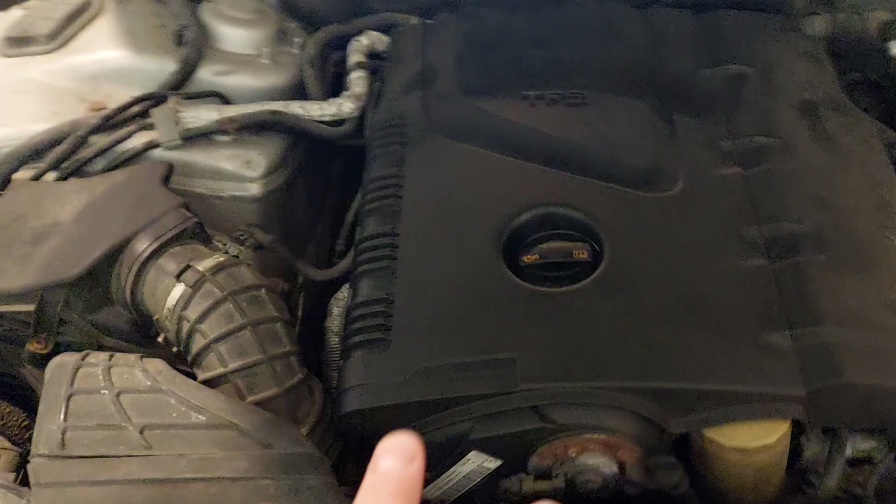Other than that, it's got stiff steering. The steering's super stiff when you turn. So the steering's super stiff, and it obviously burns oil. We don't know how much oil it burns, but

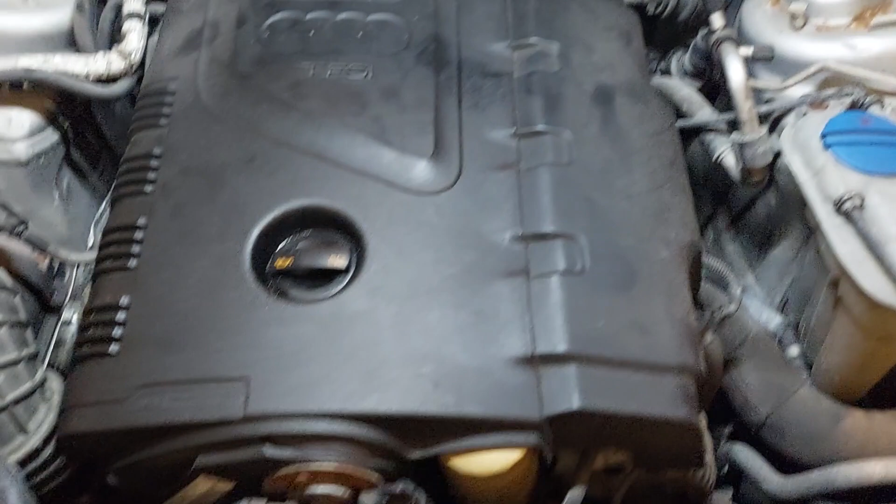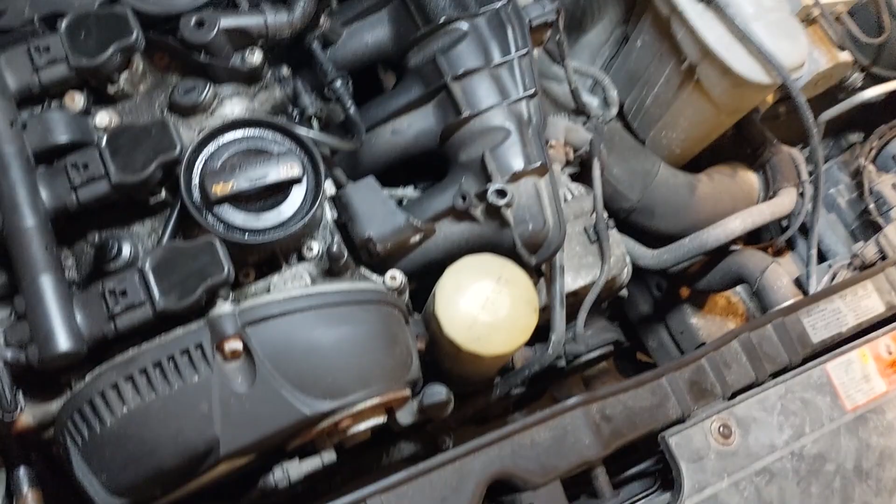Let's take a look. It's got a cylinder number 2 misfire. So I just want to see what it's going to take to repair this misfire. So I'm pretty sure it's 1, 2, 3, 4.

As you can see, we do have some oil leaks here. Okay, so I'm not sure where they're coming from, but that's something we'll figure out together after and see if this car is worth fixing.

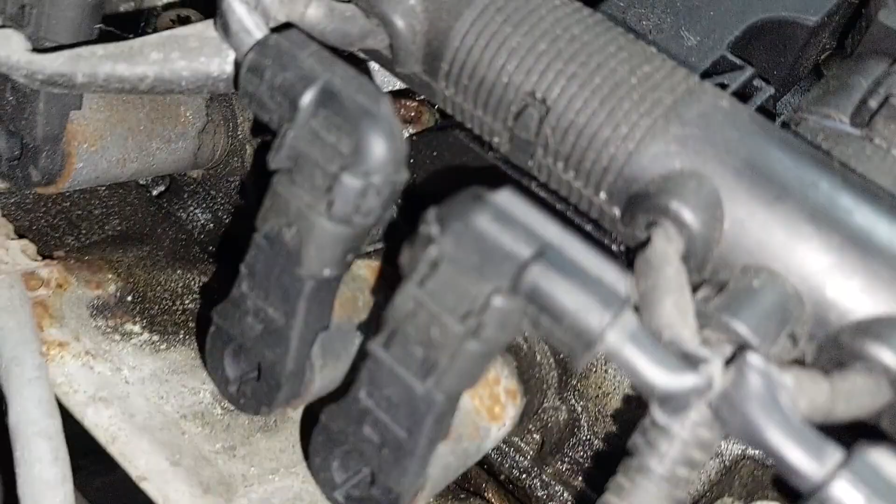Yeah, this is pretty oily back here. I know that this water pump, there's our fuel line, everything's just pretty much coated in oil. I'm wondering if this line's leaking or the diaphragm's leaking, oil cap or the seal, something's leaking here. So we'll have to figure that out. Both sides just look very oily. It looks like this seal is fine.

So first thing I'm going to do is swap coil 1 and 2. I just want to confirm the misfire is a coil or a spark plug. So let's do that right now.

So I'm going to... give me a second. Right now the first thing we're going to do is just swap a coil. That's all we're going to do. We're going to do it one thing at a time. So that's a 10 mil.

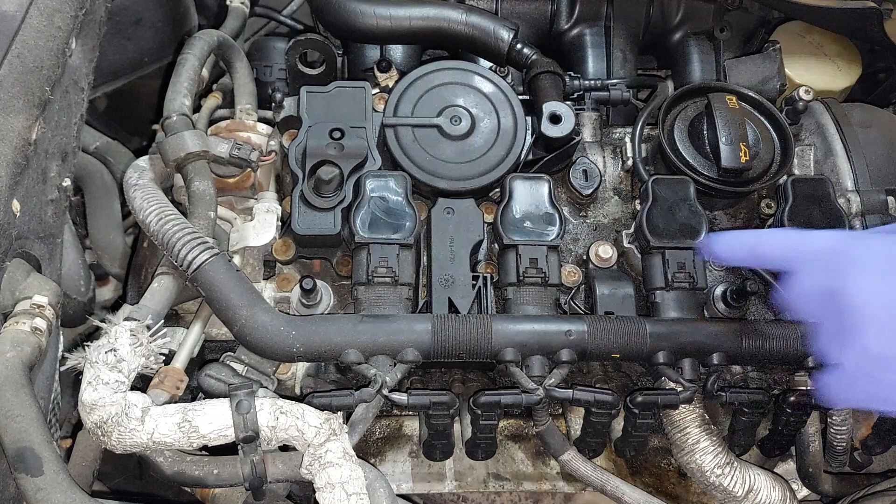Well, I think it's a 10 mil. Put it here. Okay, so it's much like the B7, the clips all just break. What are they hitting on? Well, I guess you go too far back and they...

Okay, there we go. So let's just check this one. Okay. Let's just look down inside, see how it looks.

Okay, so this one's number 2. So we're going to put this one in number 1 spot. Okay. So let's see if the misfire moves.

So make sure you check your connectors. Alright, see how it's coming apart a bit here. Okay. Actually, I would say that the B7's a little bit easier to remove this. Okay, we don't want to tighten anything up because we're probably going to have to take everything apart again. But we'll just put this nut so we don't lose it.

So let's go look at our computer. Okay, well, we got cylinder number 1 detected, but originally it was a cylinder number 2 misfire. So just take my word for it.

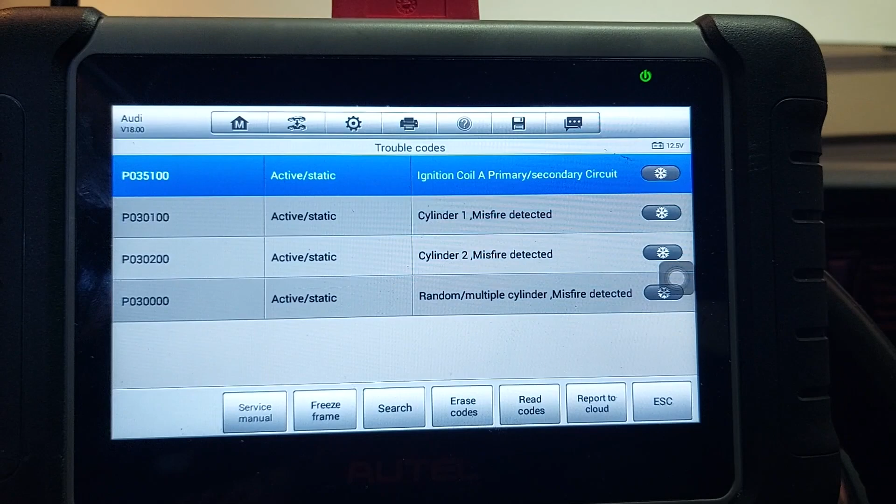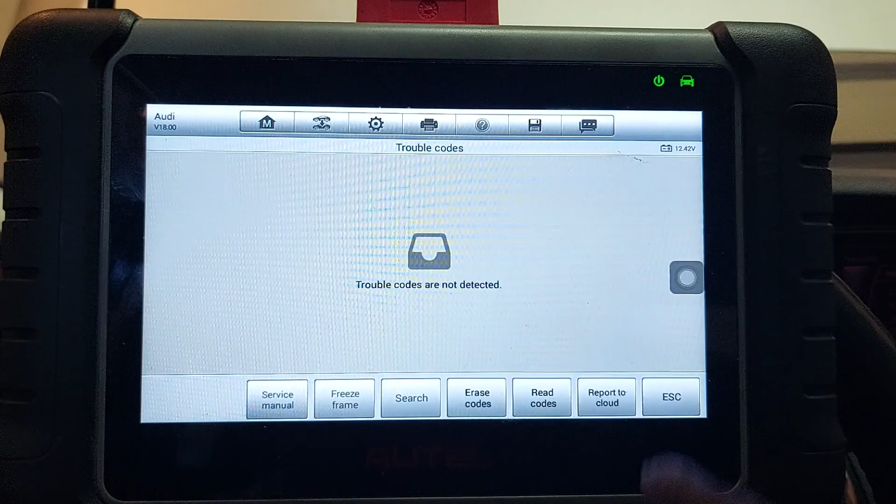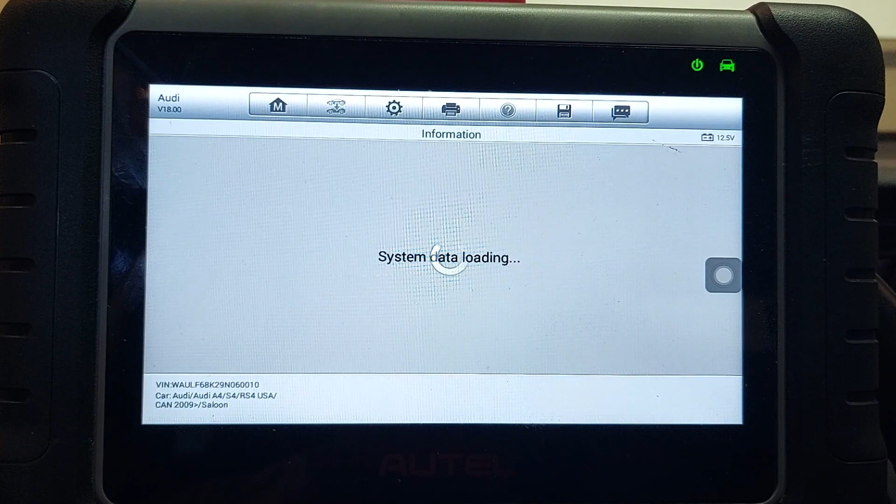So now we're going to erase these codes. Okay, read codes, should be nothing there. Escape. You got to remember, sometimes when you have a misfire, it can affect the other cylinder, the neighboring cylinder. So don't be surprised. So let's just find...

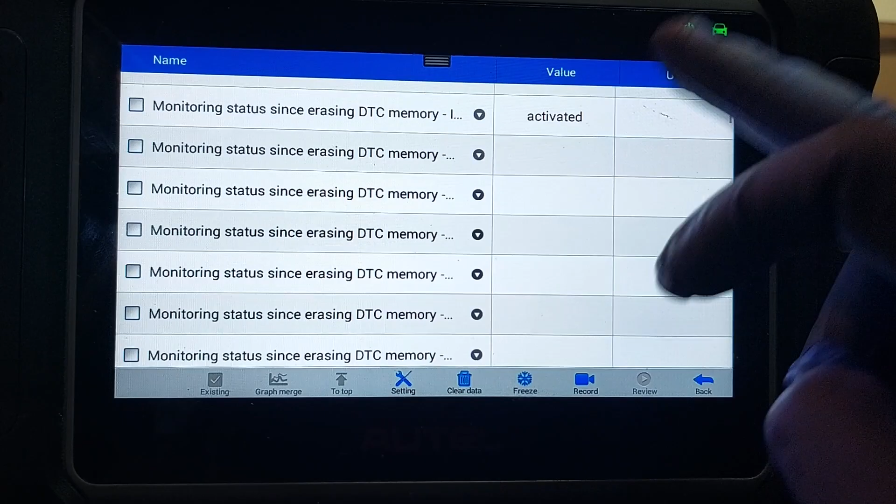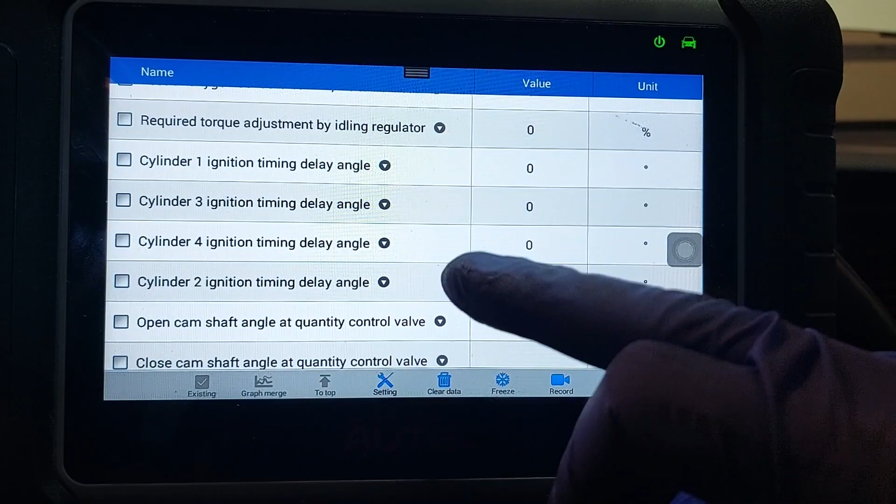Okay, cylinder suppression, misfire counter, where are you? Ignition delay, here we go. This is all we want to see. So let's just give her.

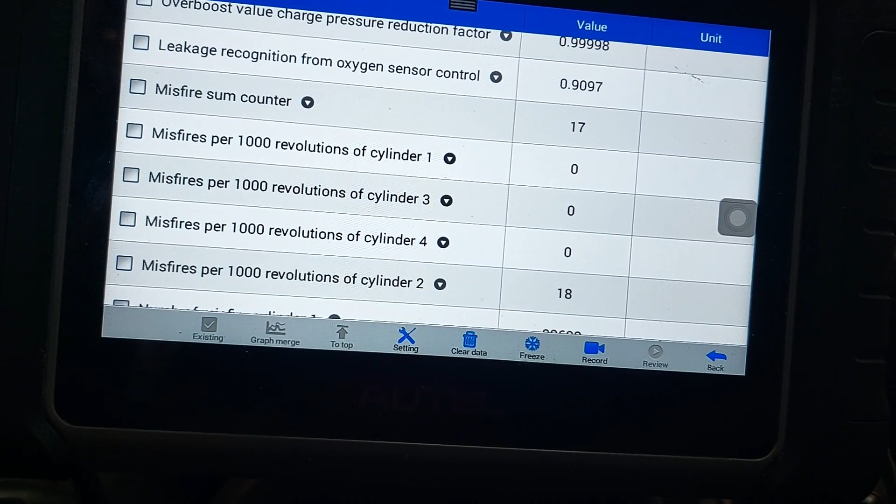Well, it's still at cylinder number 2. Okay, so it's definitely not a coil. Okay.

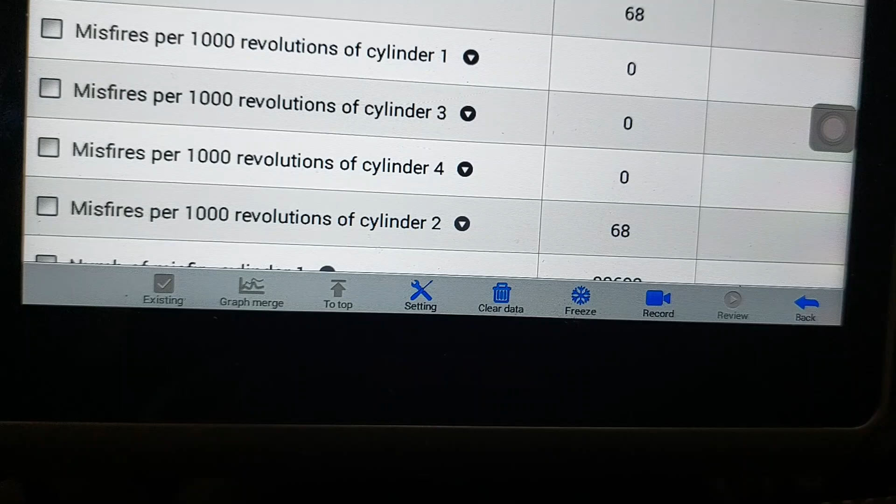Okay, so now what we're going to do is confirm that it's not a coil. Doesn't look like it's a coil, so it could be fouled spark plugs from the oil consumption this thing has. We're just going to ease this thing out of here without breaking anything.

Same idea, coil number 2. This coil goes here, and we're going to pull the spark plugs. My guess is they're all fouled. As you can see, the coil is, let's get a light on there. It's soaked with fuel, so we're going to clean that up.

Let's check the other cylinder. That's technically fine, see how this one looks drier? Either way, I'm going to clean both spark plugs up, like you've seen me do before. Just a brush and some brake clean, get rid of the carbon buildup, see if there's any cracking, and then we'll reinstall them.

Okay, the spark plugs are cleaned up pretty good, as best as I could. So we're going to put the number 2 spark plug here, and I cleaned out the number 1 spark plug and we're going to put it here. But I say, why don't we just have a look down in the bore? So I'm going to get my camera, and we're going to look down inside.

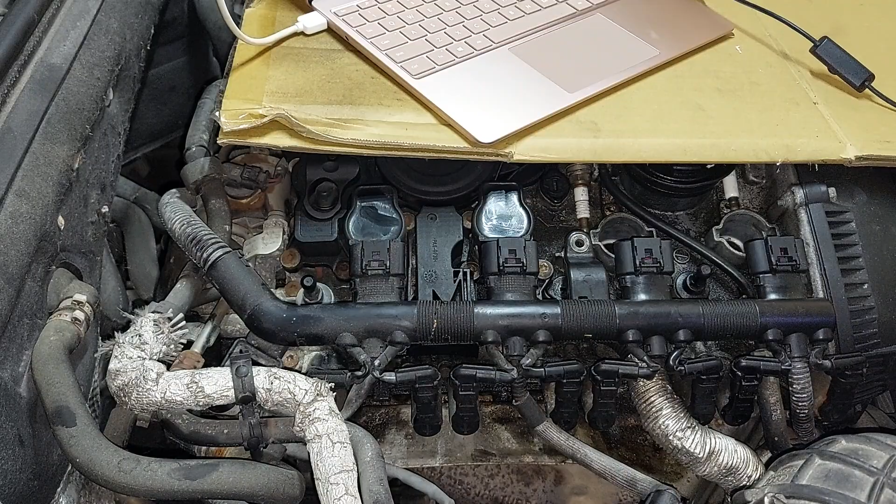Assuming you guys want to see this, so I can control my brightness. Let's take a look down in cylinder number 1 and see what we see, which is a cylinder that wasn't having an issue. Okay, come on, get in there.

Look at this one, it's a little wet. So here's what we're gonna do: if we want to see if the injector is dumping fuel, all we gotta do is this.

We look at it with the camera. Okay, get in there, get in there. And I'm just gonna open the door to the car, and it should prime the pump. And if the injector is leaking, technically you would see it, but I don't think that's the case. So what we're gonna do is blow out the cylinder to get rid of some of that, not helping on a dry start, and blow into the cylinder with some air.

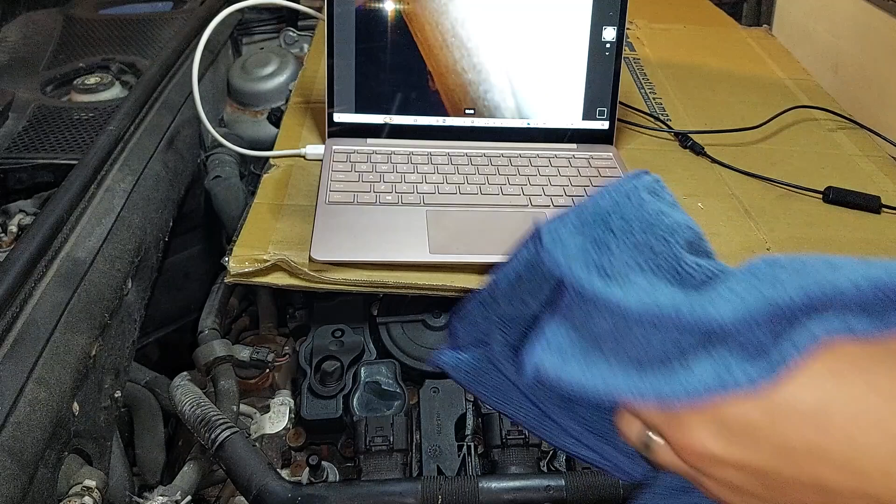You can smell the fuel, it's unburned fuel, that's what you're smelling. You can smell it, because there's no ignition, right? So you're fouling up the entire cylinder, it's just literally fuel washing down the cylinder.

So what we could do is put a drop of oil in the cylinder, and it should help with compression on startup. So we're just going to put a little drop of oil. Let's see. Okay, and that, we can take a look at that, see if it's working its way down into the cylinder.

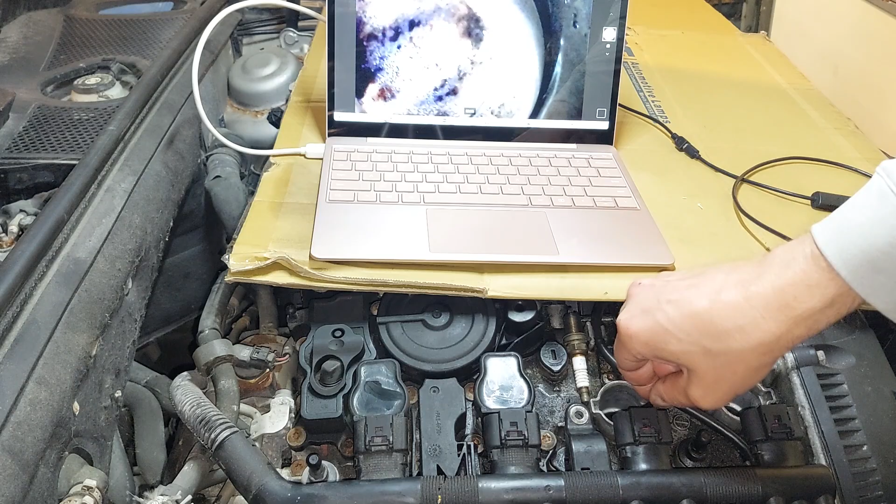Okay, and then what I'll do is I'll grab my gun and make sure that should help the ring seat on the initial start to get this thing going. There we go, we got some oil in the cylinder. Perfect, all right, so let's get this out of the way.

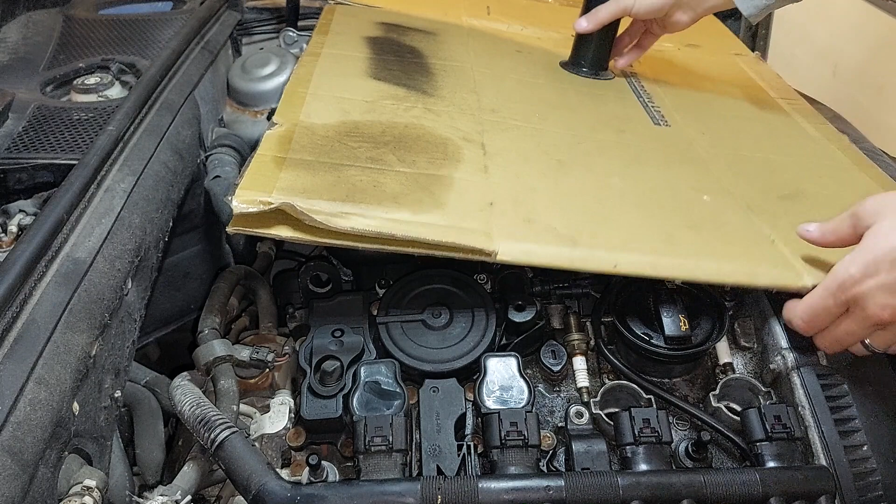Now we're gonna find out if it's a coil or a spark plug. Well, we know it's not a coil because we swapped it. So I'm also swapping the spark plug because I just want to make sure that it's not an injector issue. So this would kind of confirm that for us. What I'm going to do is put the spark plug from number 1 in here. They were way over tightened, but that's okay. All right, so this is technically the bad spark plug, if it is bad. I think it was just fouled. Okay.

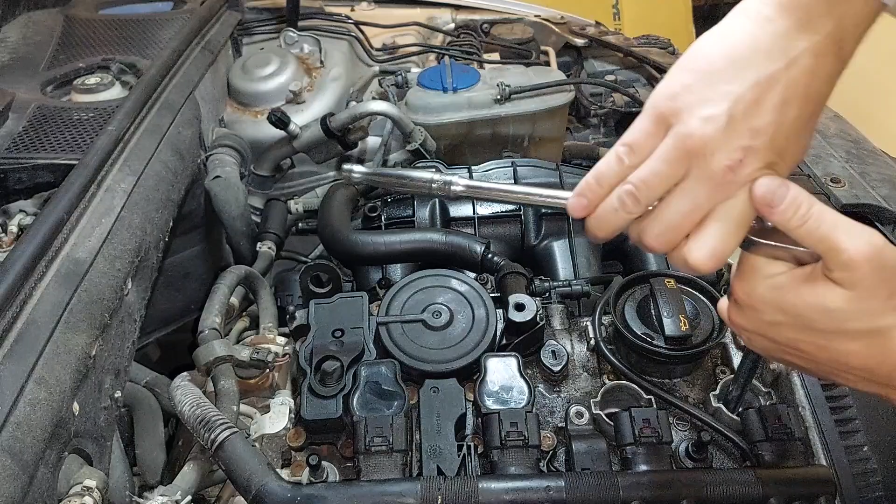Unless we have a leaky injector. I kind of doubt that. I think it's just from sitting, too many small starts. It happened on my other A4, and I just cleaned the plugs.

Okay, so now we have everything originally from number 1 in number 2, and everything from number 2 in number 1. So if it's not this, then we're suspecting maybe a leaky or faulty injector, although I doubt it's faulty because you can clearly see that it's been dumping fuel on those cylinders. Okay, so let's just get this all lined up here.

Okay. Hopefully it's not an electrical issue. Grab our bolt.

Let's go back in the car and see if anything's changed on startup and watch our misfire counter. Could technically just be completely fouled plugs. So let's...

Okay, there we go, so we're back in it again. All right, so we're gonna do trouble codes, make sure everything's deleted. Nothing yet, because it would be only pending. Live data, scroll all the way down to the bottom again. Where's our misfire counters? Oh, there they are.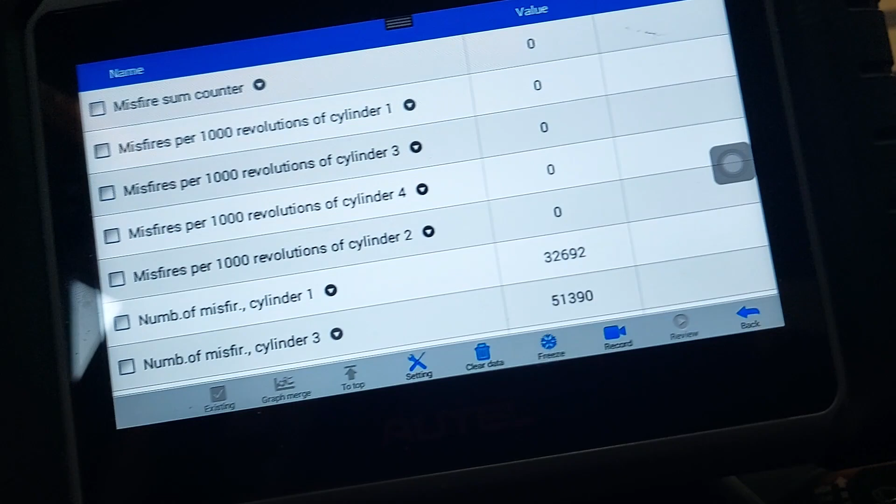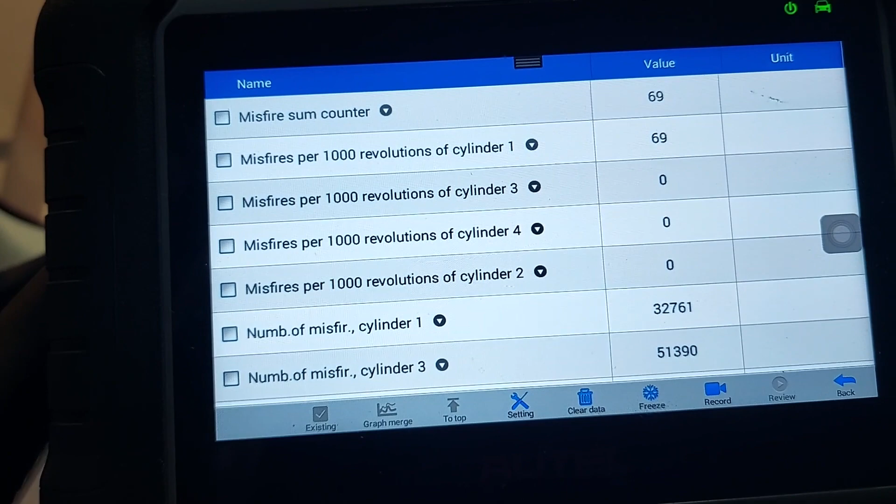Okay, so let's see what happens. Oh look, cylinder number 1's misfiring now. So I'm suspecting that we have a completely faulty spark plug.

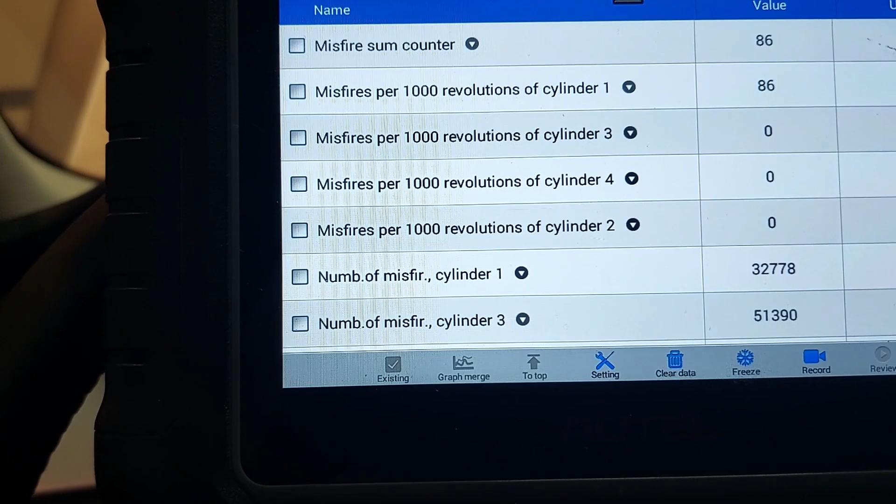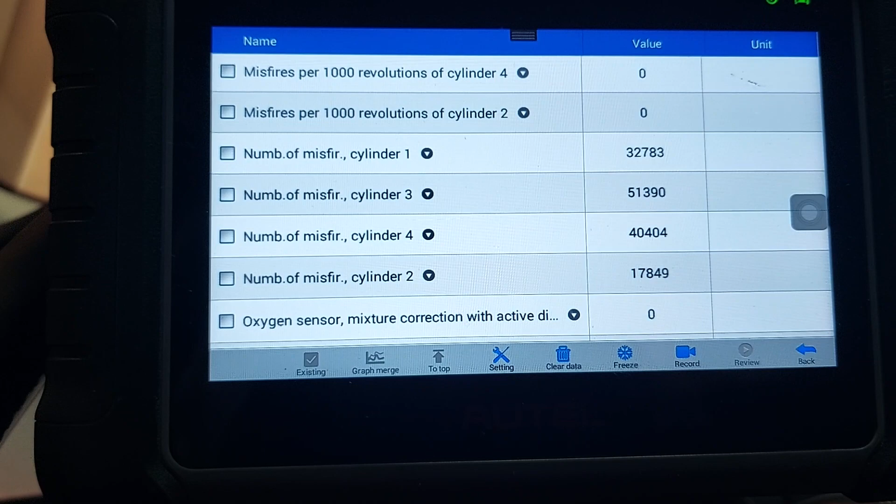So I don't know if we're going to be able to repair this without spark plugs. But let's try this again. Hold on. Oh, now see the misfire move to 1.

Is there any way we can tidy up that spark plug even more? Because we don't want to flood this cylinder. That we do not want to do. We do not want to flood this cylinder up. Is there anything else I could do to clean up that spark plug?

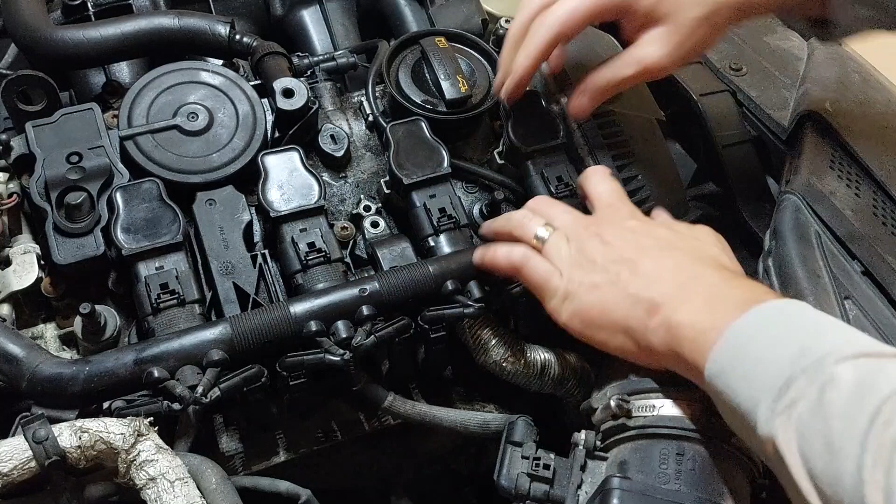We could try, it looks like it needs spark plugs and not a coil. So in my opinion, it needs spark plugs. So let's just pull this coil out.

Take that spark plug out again. Take a look at it one more time. See if we can revive it, unless it's cracked from just being fuel dumped on it constantly, which could be the case. Okay, let's look at that again. This just might be too far gone. Okay, I'm gonna try messing with it.

Okay, I cleaned the plug even better. Carb cleaner, everything. Let's see what happens. Let's see if we get lucky.

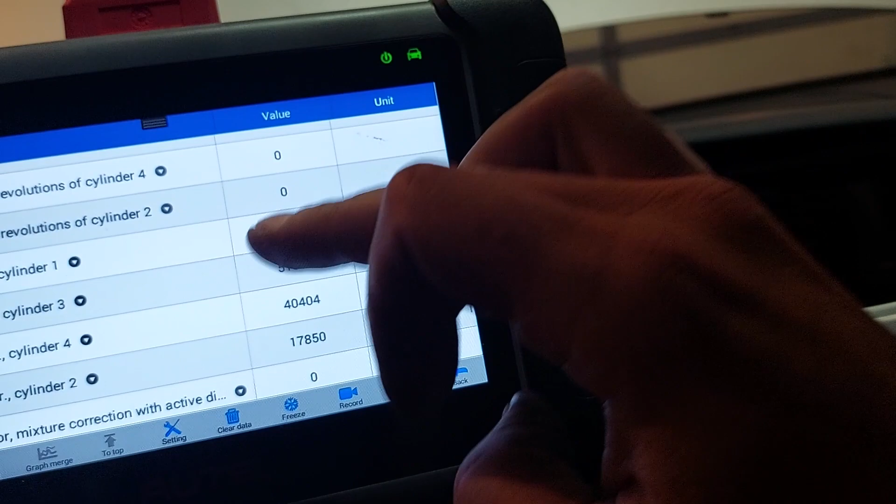Oh, ho, ho, look at that. No parts required.

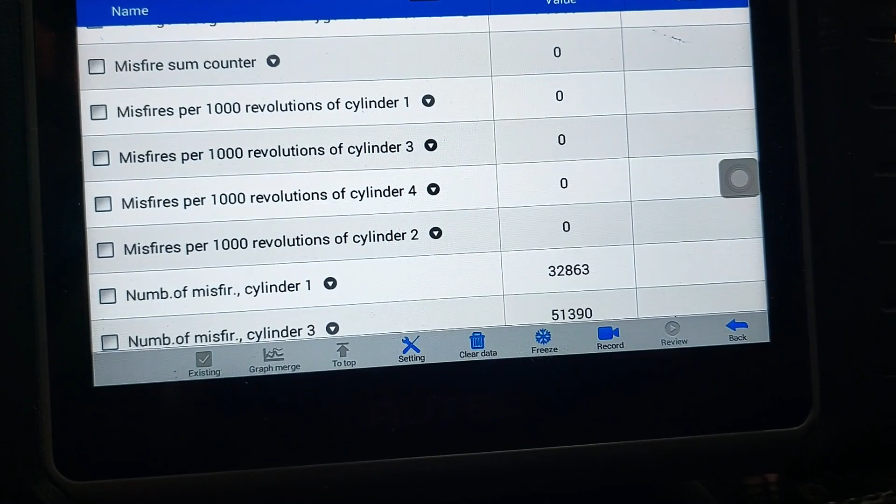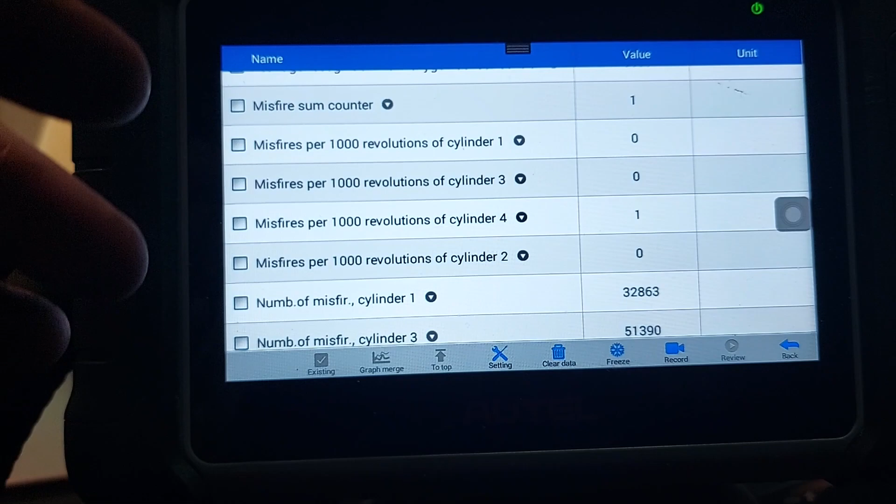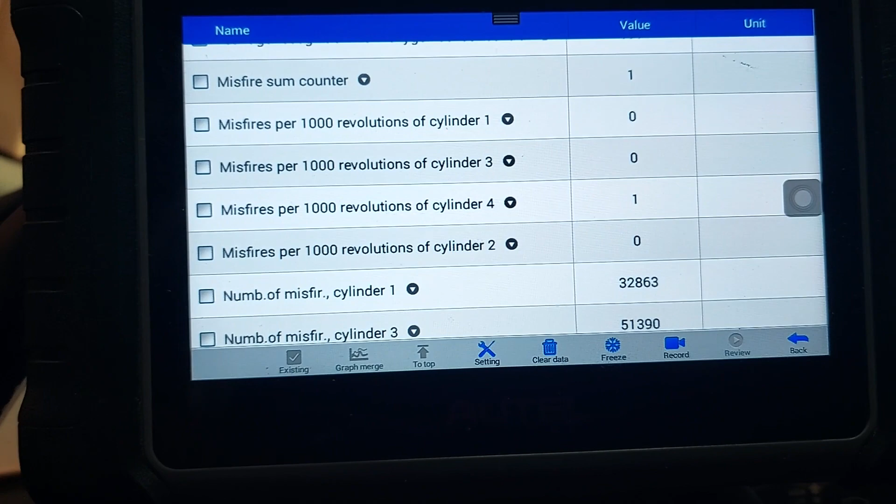So what pretty much we have is too much carbon buildup on the spark plugs from the vehicle sitting for way too long. And what you get is fuel drying up there, oil drying up there, which cakes the plugs. Pretty common on Audis. So I think now we can go for a road test and see how this thing really drives. So let me turn it off and get it ready to get out of here.

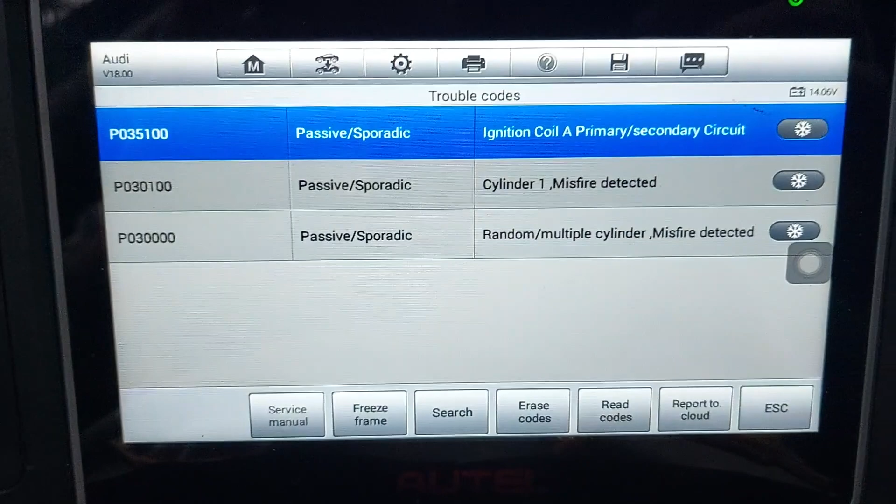I don't think our spark plug is great. We still have... let's erase these codes and see. Maybe it was already there from before. Okay, let's see what's misfiring right now.

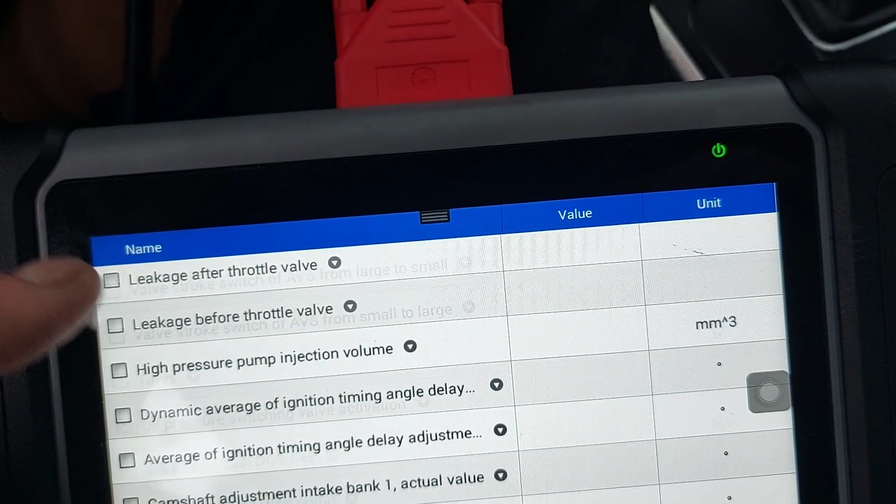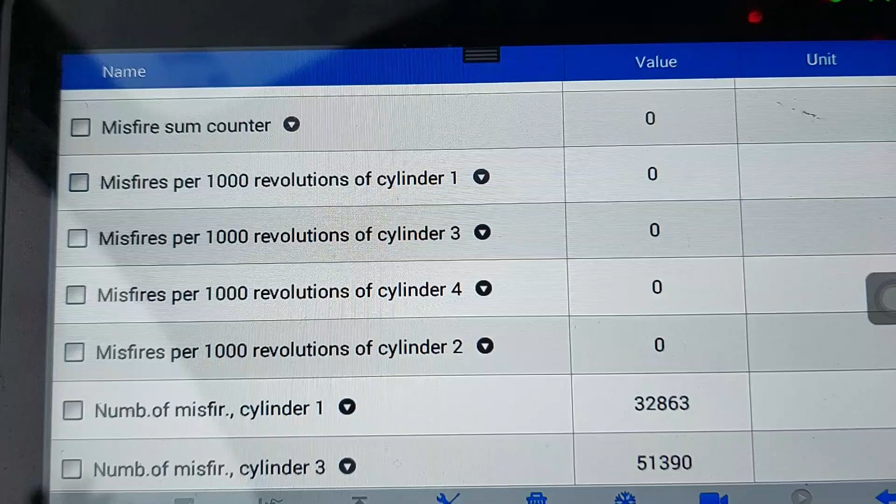Doesn't feel 100%, but take a look. Let's see under load. These cars only like to misfire when they're under load, so you put it in gear. No misfire. You can hear it stuttering a little bit.

Needs gas, it's low on gas. Alright, so let's see, so it seems to be idling quite nice right now. So I don't know if we just got lucky.

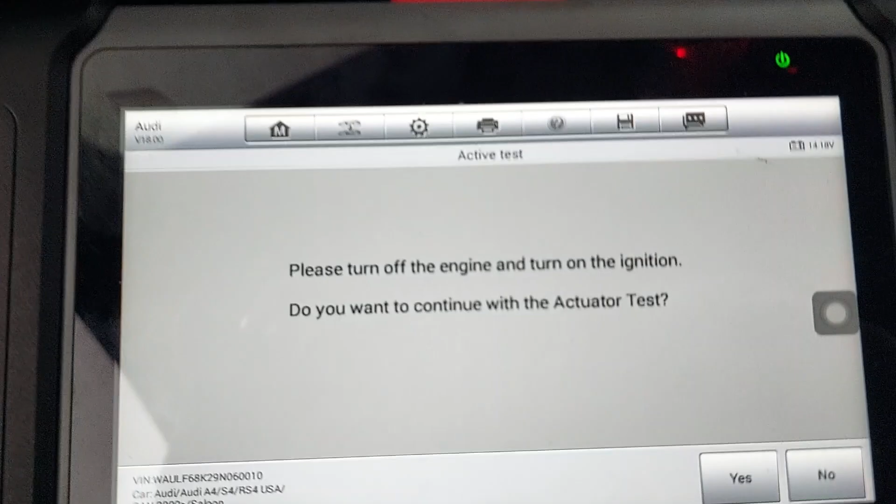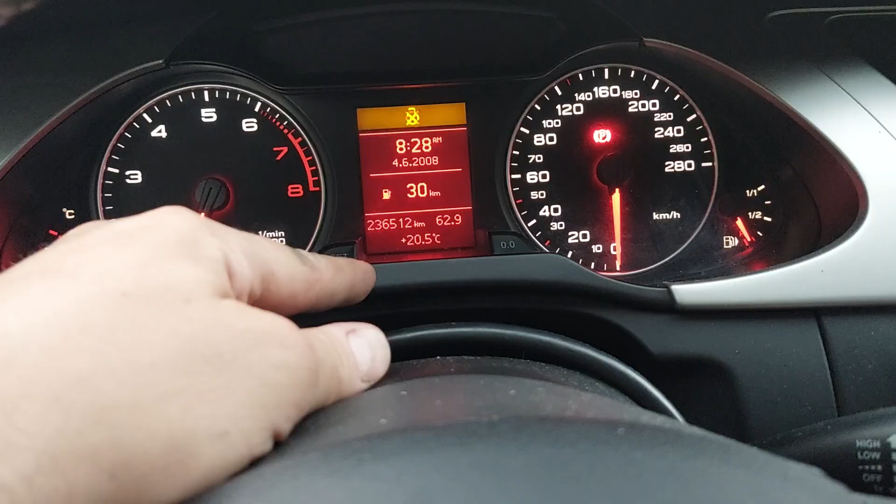Alright guys, so you can see it looks like we should probably still put a set of plugs in it. But what we could really do is put some oil in it, do an oil change, and go over this entire vehicle and see everything that it needs. See where our leaks are coming from.

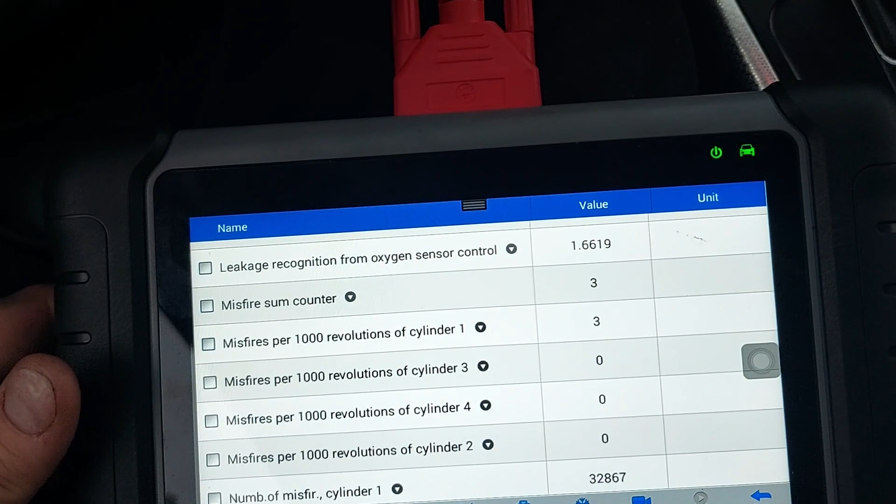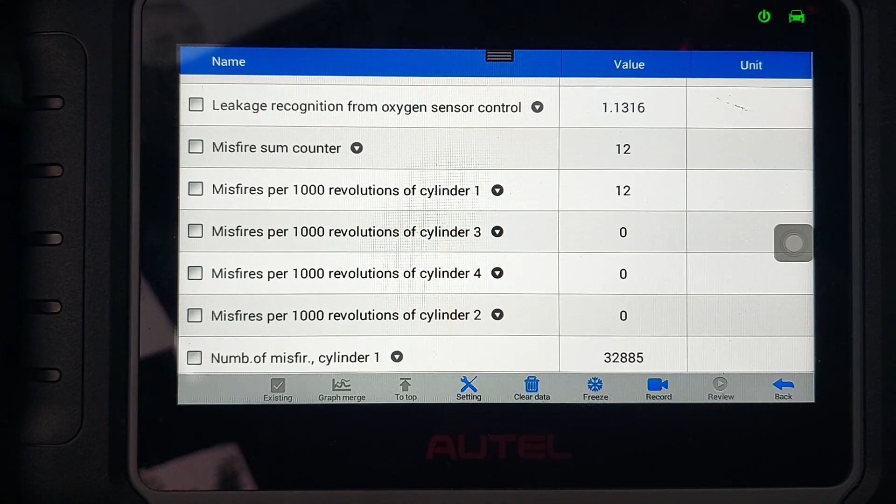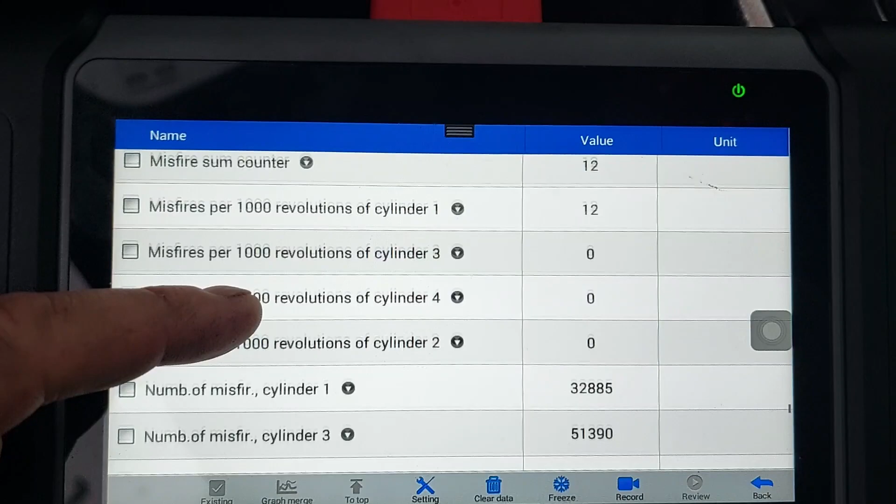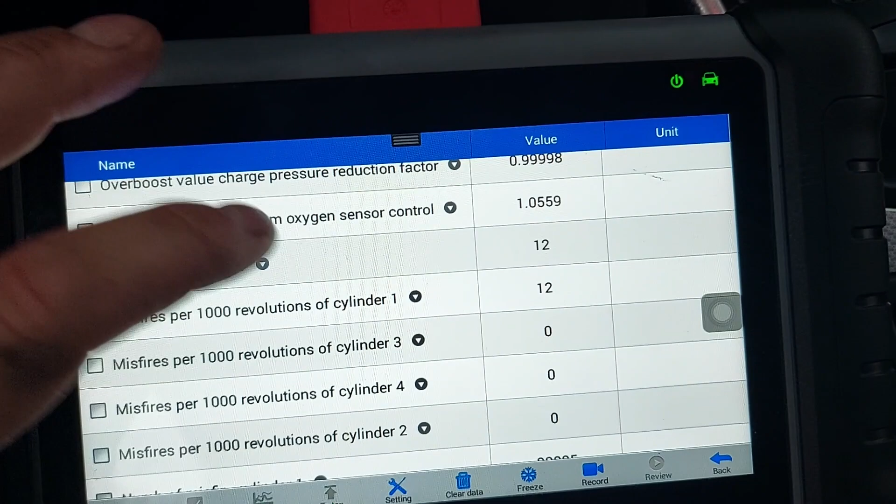So let's go for... oh, see that? Look, now it's misfiring. So it looks like our spark plug is getting weak, and at times it can't handle it. So Raj, eventually our misfire counter will reset, it reaches a point where the counter resets back to 0. Regardless, it's misfiring now.